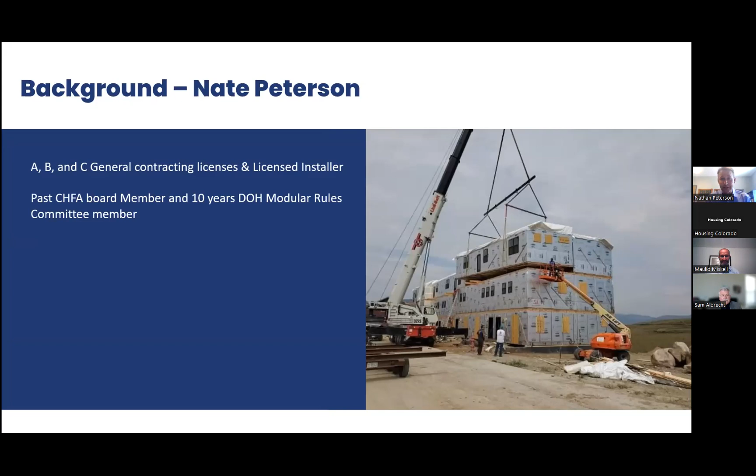I have my A, B, and C general contractor's license. I'm a licensed installer for modular housing, something the Division of Housing also regulates. I'm probably closing in on 700 to 1,000 modular boxes I've set in my life over the last 20 years or so. That's actually me in that man basket in the picture, on a project up in Granby about 2 years ago - a bunch of townhomes we put together. I'm a past CHFA board member and have spent 10 years working with the Division of Housing on their modular rules writing, trying to help our industry. I'm a big affordable housing advocate, which is why we wanted to put this together for you guys. From an education background, I'm a mechanical engineer with an MBA in finance and accounting.

Important to note, nobody's trying to sell you anything here. I run a retail sales operation and do our own development work, so there's really nothing I could sell you. I just wanted to, as somebody who's an advocate for affordable housing, pass along as much information as we could about how we've been doing this for the last 18 years and some of the lessons we've learned.

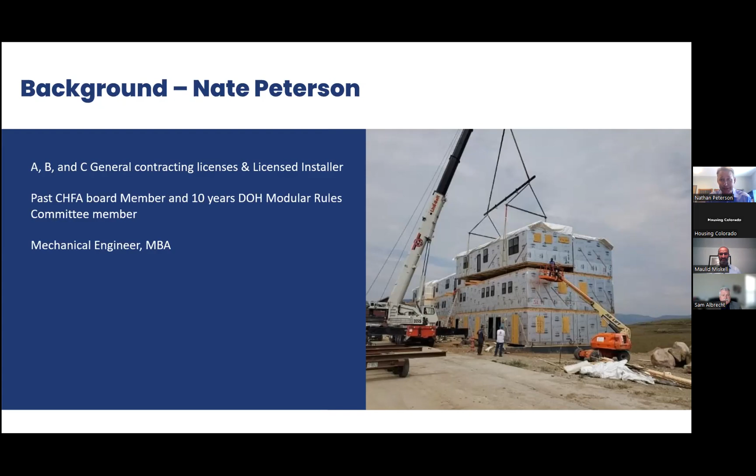So we wanted to start out by talking about the difference between modular versus manufactured housing - two terms that often get thrown around interchangeably, but there are some pretty big differences between them, and we just wanted to make sure everybody was on the same page.

Manufactured housing is what a lot of people might call mobile homes. They don't make mobile homes anymore, technically - they make manufactured housing. But manufactured housing is built to a building code managed by the federal HUD agency, and it has different building standards. They allow for 2x3 walls, and the insulation isn't as good, things like that, but it allows for a very inexpensive way to produce a housing vehicle.

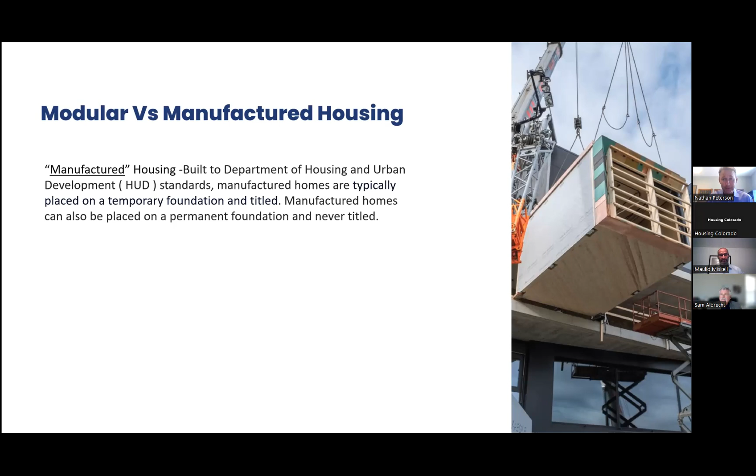One of the big differences between manufactured and modular housing is that manufactured housing typically is placed on a temporary foundation - often jack stands - and the house itself is tied down to the ground through stakes and strapping, then skirted. Manufactured homes can be put on a permanent foundation, but when they're not, they actually have a title because the trailer they're delivered on stays underneath them, so they can be moved down the road at some point in the future, which is why they have a title.

Then we get into modular housing. Modular housing is the same as traditional construction in that it's built to the same set of ICC codes that traditional construction is built to, whether it be IBC or IRC code homes. Modular housing is typically built with the same materials as a site-built project, but one key difference is that a modular house is placed on a permanent foundation in Colorado.

One question that came in from participants ahead of time was to talk a little about financing on these units. With manufactured housing, because it can move, financing can be a bit of a challenge - there's chattel financing, as the terminology goes, and various resources if you need to find financing mechanisms for manufactured housing. With modular housing, there really are no restrictions. Having been in this a long time, pretty much all the traditional financing mechanisms - conventional mortgages, all of those things - are available for modular housing. The reason is it's really no different; it's built to the same exact code as a stick-built, site-built home. So there's really no financing challenges on the modular side of things.

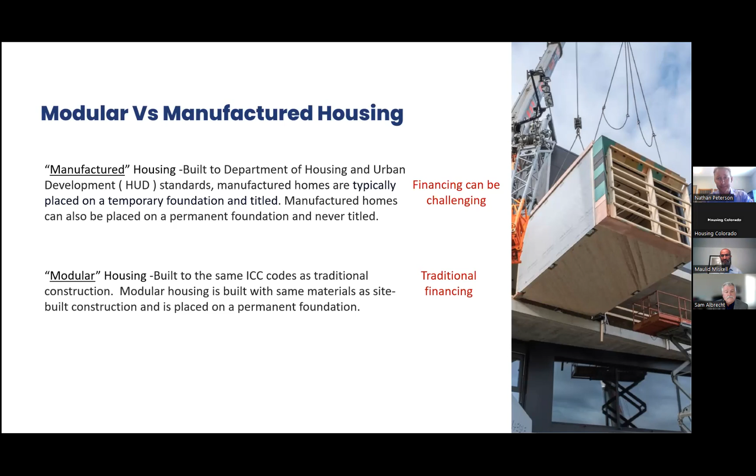So I wanted to cover a little history of our industry in Colorado. Fun fact: our first factory was in Littleton, Colorado in 1940, when the industry showed up in our state. I showed up on the landscape in 2005 or so, and at that time we had around 4 substantial factories in our state. So we were starting in 2005 with a set of factories, and then the downturn came. In 2008 and '09, if you were in this business, you knew things got a little rough from a housing standpoint, and eventually all of our factories went out of business.

By the time we got to - sorry, let me move this, trying to get this bar off my screen, I can't see it.

By the time 2012 and 13 came around, all of the factories that we had in our state had either pulled back to their sister factories located in surrounding states, or they just closed their doors because of the housing downturn that happened. By the time we got back, we spent about a total of 10 years in our state without basically any notable modular factories. And so now we're back up to basically 4 factories.

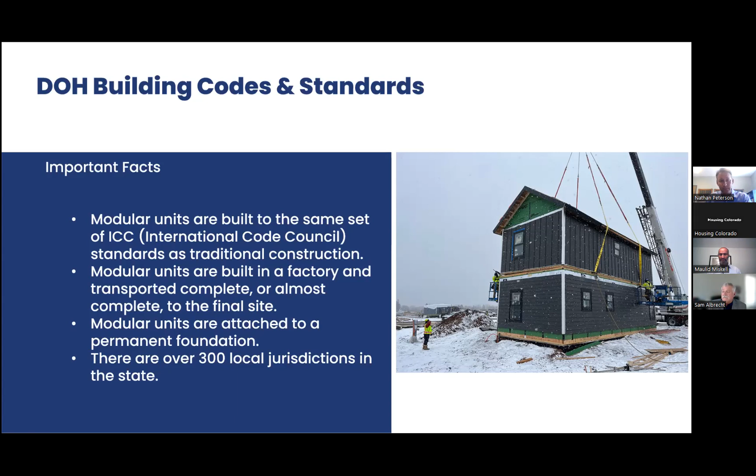So as I said, we regulate the construction, inspection, sales, and installation of modular housing construction for the state of Colorado. We provide one set of building codes for the entire state. We're on the 2018 set of codes, pretty much, with an exception there. We've adapted some of those building codes to be more specific for the modular industry, so we have our own set of building codes that we actually went through an extensive rulemaking with a lot of stakeholder input, and then it goes up to the state housing board, which approves our administrative rules that include our building codes.

The exception is we want safe and quality units designed to meet the environmental conditions of the local jurisdiction. Every unit, once we see the construction drawings, has an address on it—except for some lot models, which we have a way to make work too. Every home goes to an address, and then we look at the local wind loads, snow loads, winter design temps, fire suppression requirements if they have them, and wildfire risk for the structure if the local jurisdiction has them. We make the manufacturers design for that.

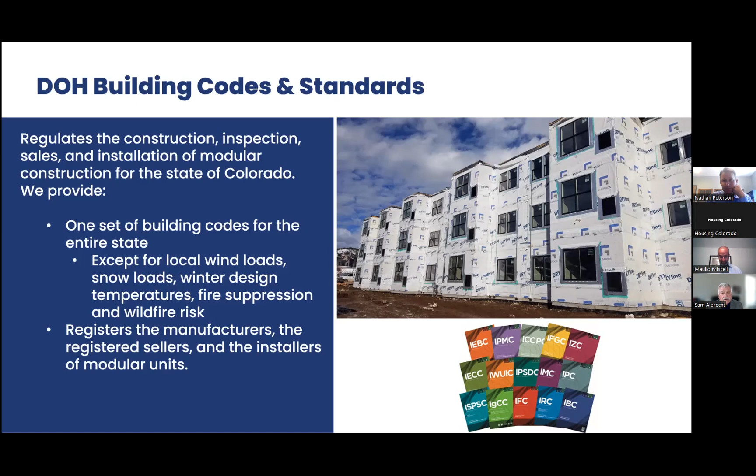Let's talk about those 300 local jurisdictions. We spend a lot of time talking to and educating the local jurisdictions. We consider them very important partners, because when a modular unit is designed, we look at the construction side, but the factory, manufacturer, or seller has to make sure it's properly zoned and permitted based on that local jurisdiction. Some sellers do it a little different, but there are two parts, and the foundation is generally under the local jurisdiction's requirements. So we make sure the home is built right and set right, but the local jurisdictions can't change the code.

It's never a problem generally to go backwards, but we have local jurisdictions that are still on a 2006 set of building codes. New codes, like ours, come out every three years—so there's the 06, 09, 12, 15, and 18 versions, which we're on, and 21 is the most current.

Sometimes a new person in a local building department tells manufacturers they have to design to the 2021 building code. That's where we get involved—we'll have a call with the chief building official and talk it through. We've never had a local jurisdiction say, 'No, Sam, you're wrong.' It's always, 'Oh yeah, that's right, I'll make sure all the guys know.' So that makes it easier for the manufacturers.

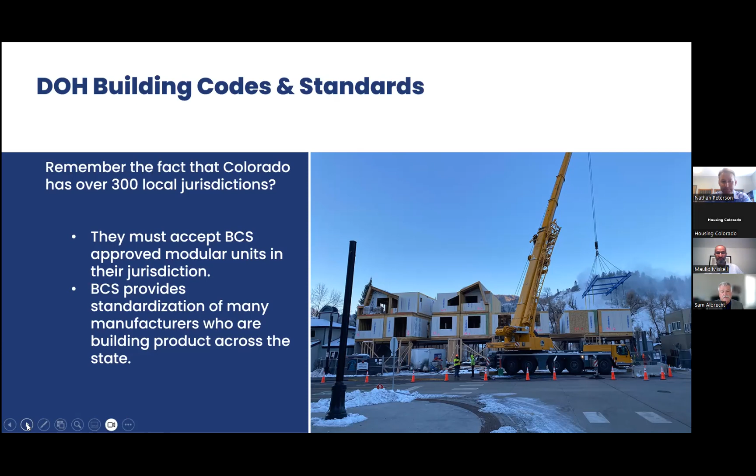All right, so this is where it gets down to the nitty gritty. I think one of the true advantages of modular is that it can be built in, out of the weather and out of the elements.

But the process steps for these are fairly simple. A manufacturer wants to register with the program. We won't register them until we look at their quality assurance program internally, and they have to have a third-party agency if they're out of state doing those inspections for them.

We want somebody in the quality assurance program that will go out there with the tape measure and the ruler and say, yeah, the screws on the drywall are 6 inches apart, that's what it's supposed to be, you guys are clear to go to the next step. And the third-party inspectors are walking through the factory investigating some of that. The quality assurance program makes sure it is built, the quality is there, and there's no shortcuts being taken.

And we have the right to audit these manufacturers as that process goes. After we look through their QA program, and it's reviewed by the engineer, reviewed by a third party, we register them, we take and cash their check, and then they can start sending us construction drawings.

Those construction drawings are submitted. They have to have that address like I talked about, so that we can check the local requirements for wind, snow, fire suppression, winter design temp, and the other local conditions. And then once those drawings go through a third-party agency also for initial review, they come to us for the final stamp.

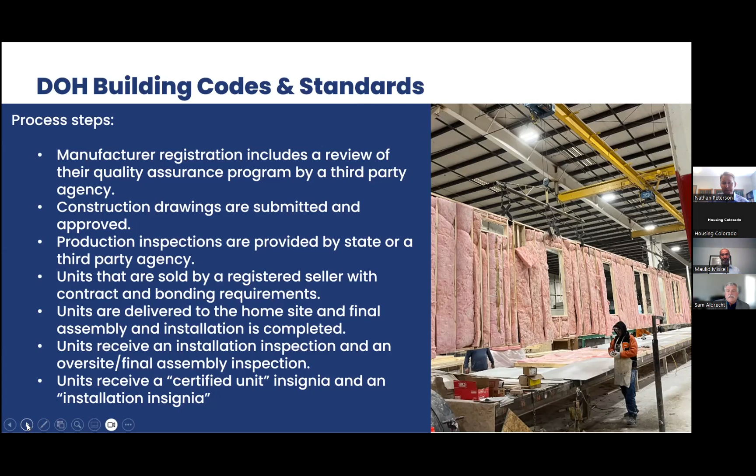All right, I think this is my last slide, but just to talk a little bit about some new things that have come out as a result of statute - we just recently brought tiny homes into the factory built structure program. So now we take a look at the HUD stuff that comes in as far as the installation side, but that federally manufactured home, that HUD code home we all remember as mobile homes, we just do the installation of that. Modular is our big piece where we're doing both the single family and multifamily residential.

And then also we do a commercial program also for commercial factory built - think your standalone coffee shops and things like that that come in as a box. And then we just started this year with the foundation systems.

We have a consumer complaint piece of the program too. The legislature decided that one of the things they wanted us to do was to approve the design and inspect all foundation systems for factory built structures in areas of the state that do not have a local building department. And that's critical to make sure these things get installed correctly. So we're starting off on that process as of the 1st of July of 23.

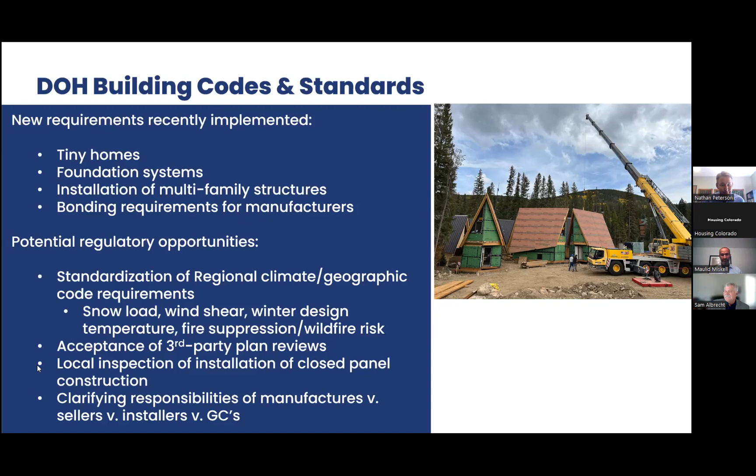Just to clarify, it's a point in time. Just like when a mobile home became a manufactured HUD code home, that cutoff was June 15, 1976. Prior to that date, they were mobile homes built to whatever standard was in the head of the builder, whether or not it was accepted by a local jurisdiction. On June 15, 1976, the federal government effectively stepped in and said from this point forward, they're going to be built to these established standards.

Tiny homes are similar. Prior to July 1st, 2023, it was completely up to the local building department to determine if something was built to be a dwelling, if it was built to be safe, if it was code compliant to whatever requirements that local jurisdiction required. On July 1st, 2023 and on, it's the Division of Housing that's going to be certifying a tiny home as an actual dwelling.

So keep that in mind, we're not going back in time. If you're dealing with a home built in 2021 and they're saying it's a tiny home, it will never have a Division of Housing sticker or insignia on it, because our program started on July 1st, 2023. Just keep that in mind.

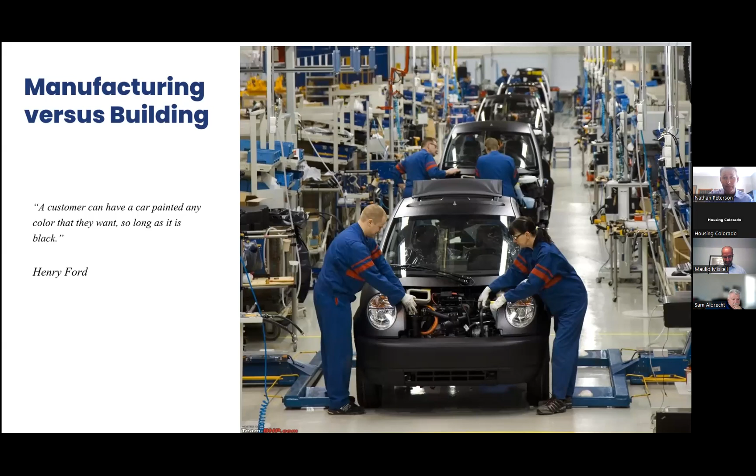We're going to go through some aspects of this. The first is that in manufacturing, all the factories have preset building assemblies - ways they like to build housing, and those vary dramatically between factory to factory. They each have a certain way they like to build their wall assemblies, and they've all found seemingly different ways to meet code requirements for energy and envelope - sometimes they use foam, sometimes zip bar.

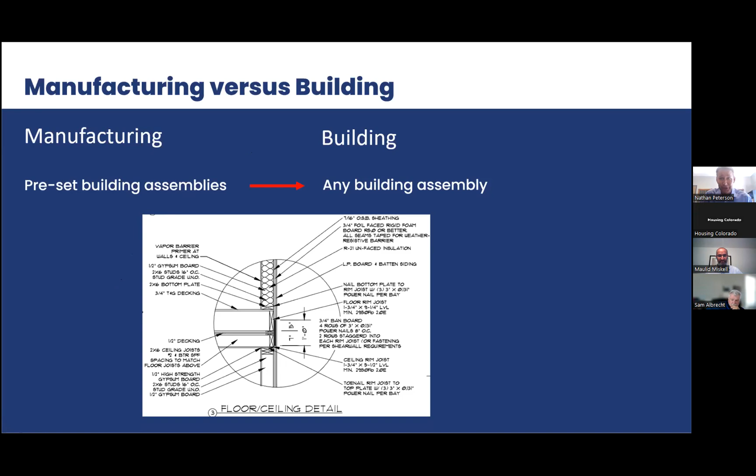This is a detail where, in a manufacturing modular environment, the ceiling is built separately from the floor, whereas in most traditional stick-built construction, the floor and ceiling are the same structural component. So there are a lot of different preset building assemblies associated with modular construction versus stick-built, where you can just do whatever you want.

The next area I want to talk about is box width and length. This is a typical floor plan for a modular house, and that's a box - this is a 2-box house, and that box has some limitations associated with it.

Maximum length we can drive down the highway is about 76 feet in the modular world. Most factories produce boxes in width anywhere from a minimum of about 12 up to a maximum of 18.

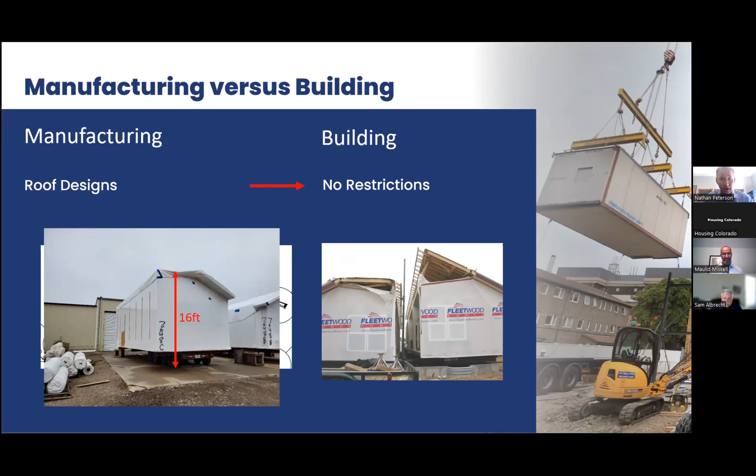The reason why they're doing all of this is when we ship these things, we're basically trying to stay under 16 feet. 16 feet gets you under pretty much all the state highways and federal highway bridges. So a lot of the roof design options that you have when you build traditional construction start to be a little bit more limited when you're manufacturing housing. It really just comes down to standardization - factories need to know that they can build a number of different roof configurations on all of their products, instead of having all sorts of variations.

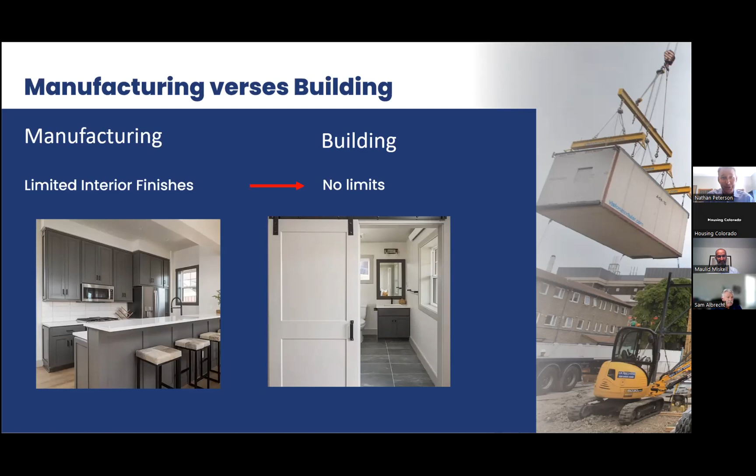Interior finishes. Just like that Ford F-150 on the line, where you can pick out your King Ranch seats or your brown or your white leather, same goes with a lot of the manufacturers. They usually offer a limited number of cabinetry and trim options - as long as you like white or gray, you're good to go on your cabinetry and trim. The reason why is they buy these products in bulk. They're not just buying your cabinetry, they're buying flat packs, truckloads of cabinetry in certain sizes that they'll design every single kitchen with. So there's certainly a lot more standardization to help with cost associated with manufacturing.

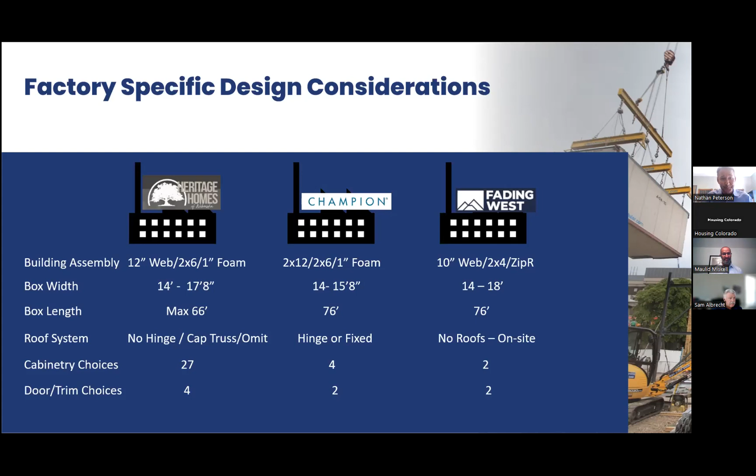One way I like to describe this: if you're looking at an affordable housing project with 2 acres out back, and you sit down with your engineering and architect team, you've got a blank canvas. You can do whatever you want, any type of building envelope, any energy system, any energy ratings. But if you're sitting down to design a modular affordable housing project, the analogy I like is it's paint by number. There are certain things you should do, and certain things you have to do, that don't come into play with the blank canvas of traditional construction.

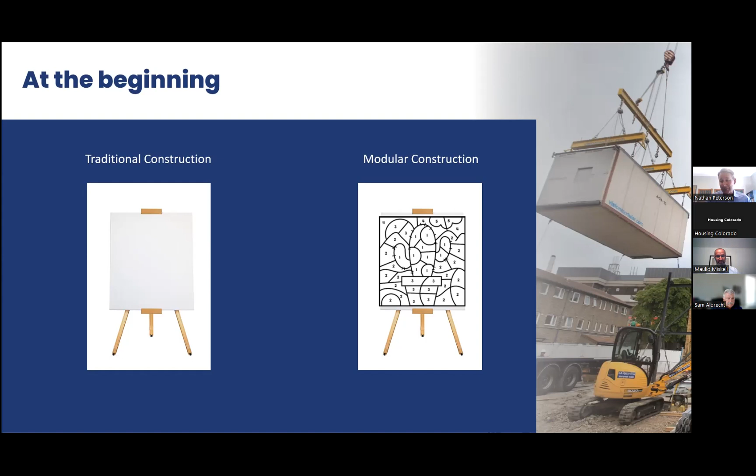At this point I think I've probably got you a little worried, thinking these things must look crazy bad because of all these restrictions. That's not necessarily the case. You can design some really nice looking modular product using all of those design limitations.

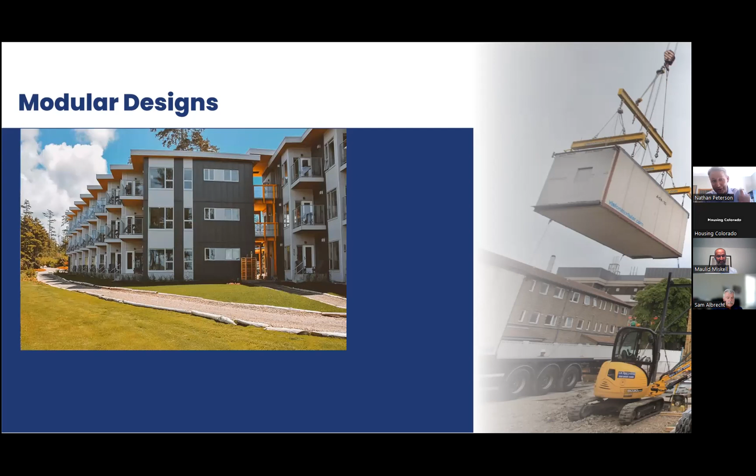These are all products our company has built over the years. This is a great product here - if you look at that roof, it's a nice shed roof, and you can build that whole thing at the factory. The little cute ones we've done.

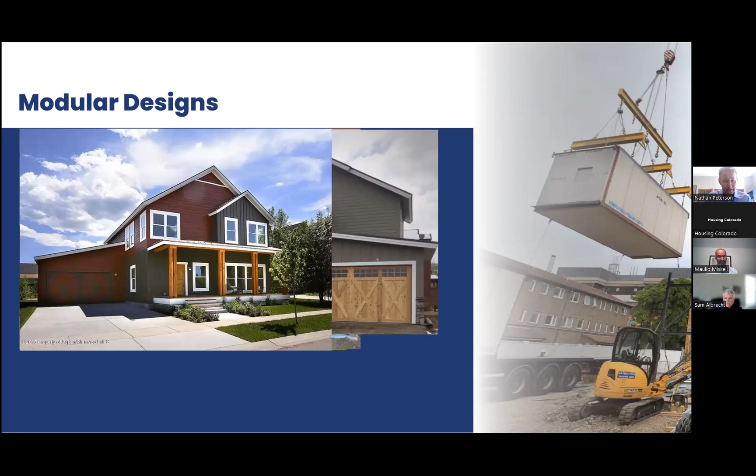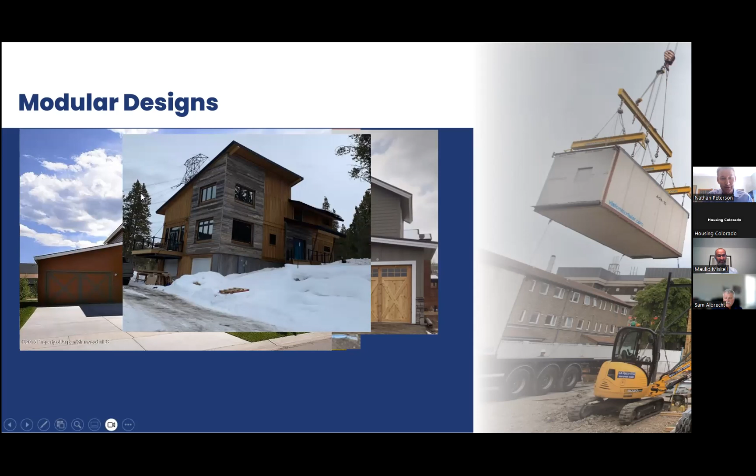Some housing we built in Carbondale, I think, and this is up in Fraser. This had a bit of stick-built roof on it - that roof pitch is pretty hard to do at the factory, so they omitted it and it was built out on site.

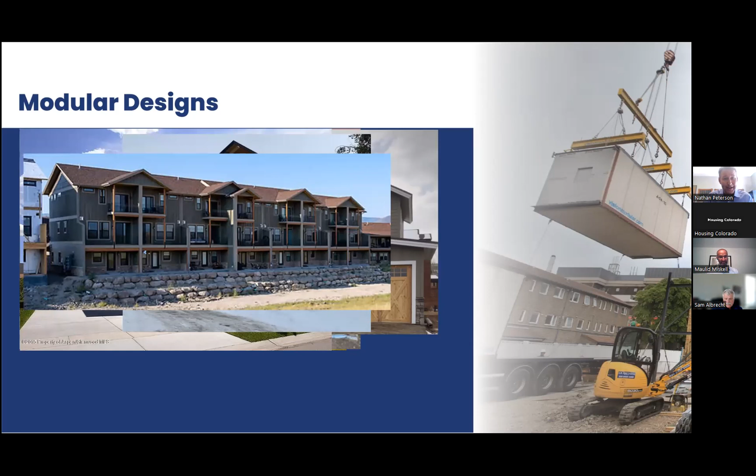This is a townhome project we put together up in Granby. On the backside, all those decks and things like that were built on site, but you can see the modular behind it. This is the front of the building.

As you look at these, knowing they're modular, you can kind of see the boxes, right? And the key is what you're adding to them to dress them up, and how you're doing that in a cost-effective manner. There are certainly a lot of rules that, if you follow, let you build modular housing very economically. But if you don't follow those rules, modular housing can get out of control price-wise pretty quick.

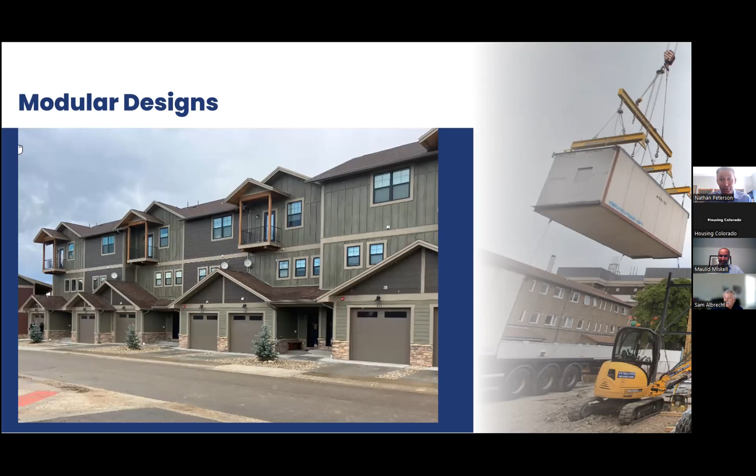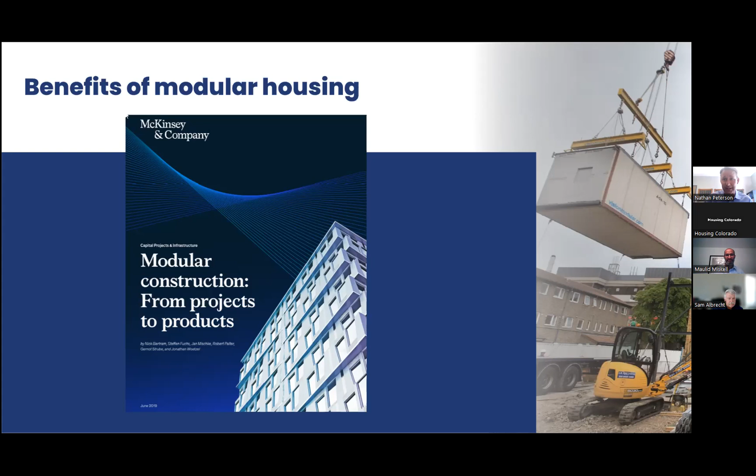So let's talk about the benefits of modular housing. There's a great study in the resource page at the end of this presentation with a link if you'd like to get into it more. McKinsey & Company, a big consulting firm, did a big nationwide study on modular projects and what type of benefits they provide.

The number one benefit from modular housing - Sam touched on this earlier - is that, one, it's built indoors, so you can build it at any time of year. Two, the site work can happen in parallel with those units being built indoors. So when you're in Colorado like we all are, with short building envelopes, especially up in the mountains, this product fits very well. Most of our business heads up into the mountains because modular works very well there. You can start your site work and be weathered in by the time summer's over, if you time it right and get the production schedule you want out of the factory.

Typically what they found is that if that can be accomplished, you're going to save 20 to 50% on your construction schedule if it all works out from a modular schedule standpoint.

The next one is cost, and this is obviously a big topic. Everybody kind of wants to know about this: what does this stuff cost? Mo earlier gave you guys some numbers on what the Division of Housing has been seeing with the 151 units that they've given awards to so far in 2023. I'll talk a little bit more about that data in a second, but as far as this study goes, there's a lot of different areas that drive cost in a construction project, and this study kind of broke them down.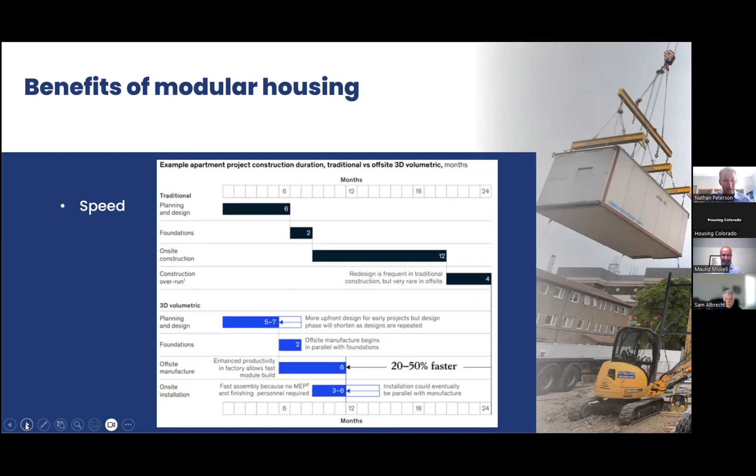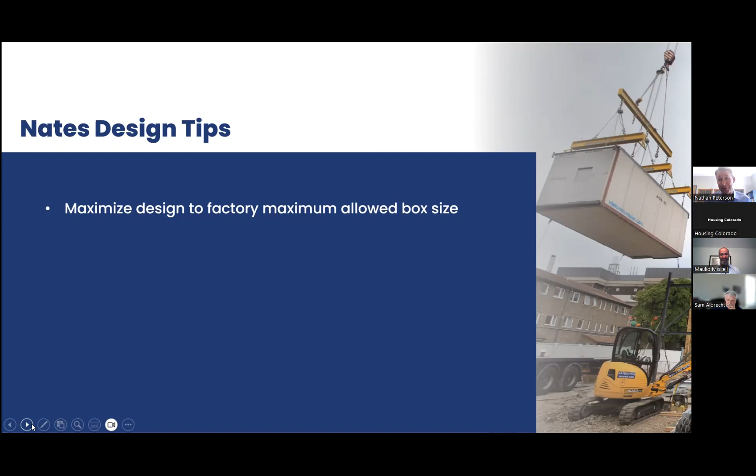So I kind of want to digress a little bit. Those rules that we're talking about - I wanted to provide you guys a slide of what are my rules when I'm designing a modular project to make sure that it is done as cost effectively as possible. Number one is to maximize the factory box size. So if a factory can build you a 76-foot long by 18-foot wide box, and you can design your project to include boxes of that size, you will definitely get the most economical price per square foot out of that factory. If you run a 45-foot box, 16 down the line, that's literally 50% of that square footage - you're going to pay a premium for basically the overhead allocation of the factory applying to a smaller square footage, even though you're taking up the same spot on the production line.

You really need to limit traditional construction activities on the project as much as you can. By that I mean building out walkout basements with traditional construction methods, adding on rooms, decks, and all those things. I realize you need a certain amount of them to make the project look right, but limiting those is what really allows you to have more of an economical experience with modular housing. Crawl spaces are your friend - try to stay away from basements unless you're just going to make them a big utility room. They're inexpensive, and they work really well with modular because we have to get under there to hook up all the plumbing anyway.

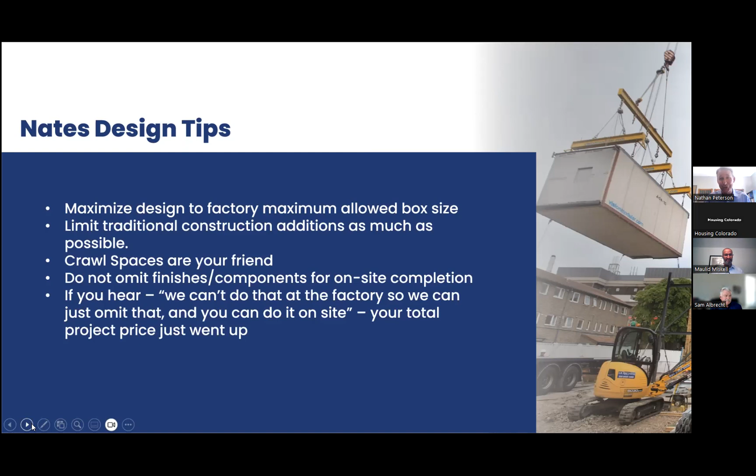Try not to omit the finishes in exchange for on-site completion at the factory. One thing that's happened over the years is factories have started to compete more in the traditional housing world, and they don't want to disappoint. So they've all been trained to say, when somebody says, well, I really want this type of roof, or I really want these cabinets or these interior doors, they don't want to say no. So what they say is, you know what, you can just do that on site, we'll just omit them. At that moment you feel good - oh, I can still have what I want, whatever the design criteria was. The problem is that if you hear that, your price just went up. Your total project price - their price might have gone down a little bit, so you think you got some money back, but by the time you're done out in the field, you really don't want it. You want the factory to do every ounce of work that they are capable of doing, and you want to design your product to maximize the amount of work that the factory can complete.

Last item: lower pitch roofs are your friends. If you can get by with low pitch roofs that don't have hinges and cap trusses on them, the factory will complete all of your roofing at the factory. Just one less thing you have to do out on site to drive your cost up.

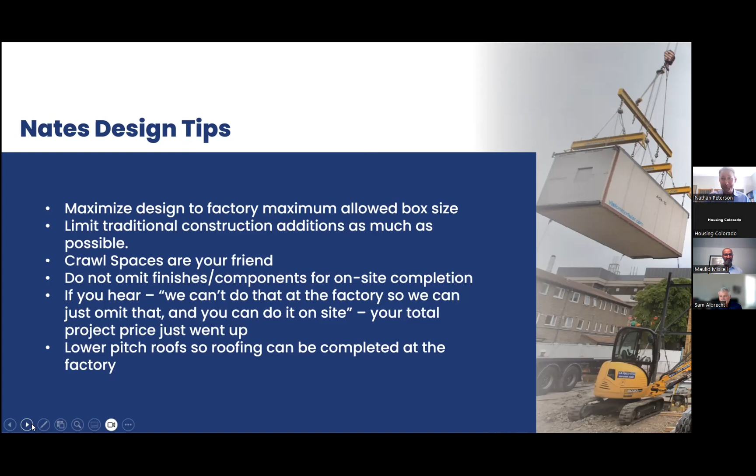So where to start? If you're considering a modular housing project, where do you start? Because like I was saying, it's a little bit different. It's painting by numbers, not necessarily the blank canvas process that everyone is used to.

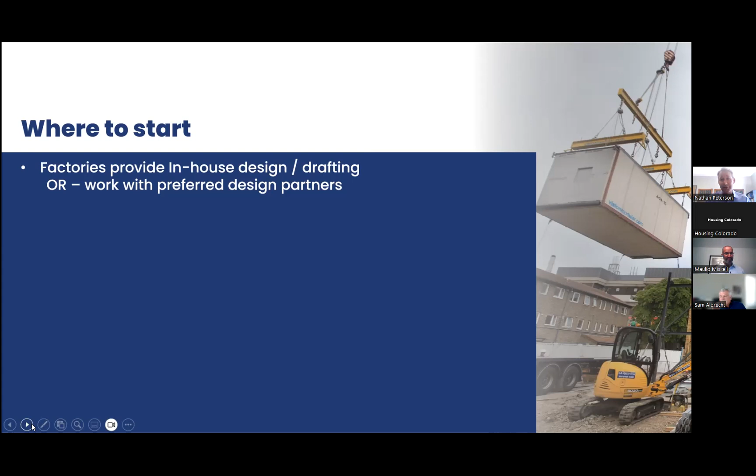When you work with modular factories, every modular factory that I know of has an in-house design, drafting, and engineering department, or some of them work with preferred design partners. I wanted to give you some examples with a couple of factories, so it's not just me telling you this. Guerdon is a really big outfit out of Idaho. They employ in-house staff for engineering, structural, electrical, plumbing, and mechanical systems, as well as full design development and plan approval submittals. Guerdon really does a lot of the design work associated with all of their product.

Fading West, on their website, does it a little different. They have a strategic partnership with EV Studios in Denver. Dean over at EV Studios has built his firm around supporting modular design for the last couple of decades, and works specifically with factories like Fading West. But Fading West takes it even a step further and says, outside of modular architecture, we are happy to work with whichever designer you would like to work with.

If you think about why the factories do this, it's because of all those things we talked about. They have the way that they are capable of building, their own structural assemblies that they're used to doing, the way that they do ceilings and roof assemblies, different trusses that they allow or don't allow. What all of these factories don't want is to have somebody else draw the project and have to educate them on what their factory can and cannot do as the project is being designed.

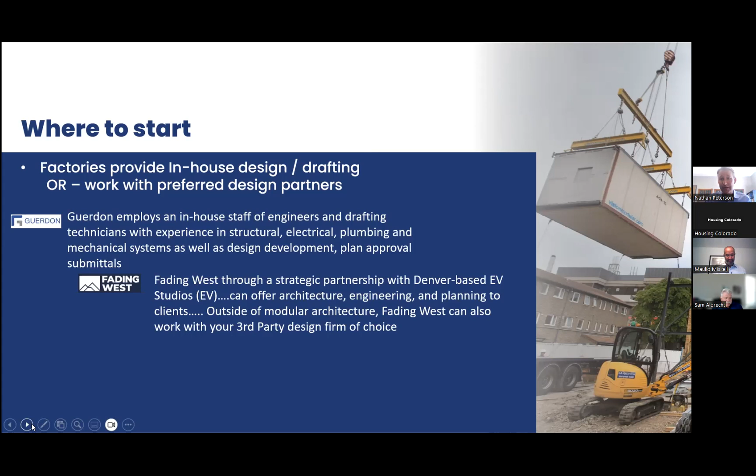Now, a lot of these factories will work with an architect if you're used to having one involved with your team. That architect will be involved in general floor planning, and certainly a lot of figuring out the elevations, the decks, and things that make a modular project look good. But that architect won't be drawing the structural drawings or shop drawings for the factory, because the factories hold that near and dear to make sure they have a standardized process to build their product.

The other one is Rise Modular. They say connecting with a modular manufacturer as early as possible is probably the best way for evaluating whether you have a good modular project or not. So that's where to start. I would say a lot of these conversations start either directly with the factories or with some of the designated design partners that these factories work with.

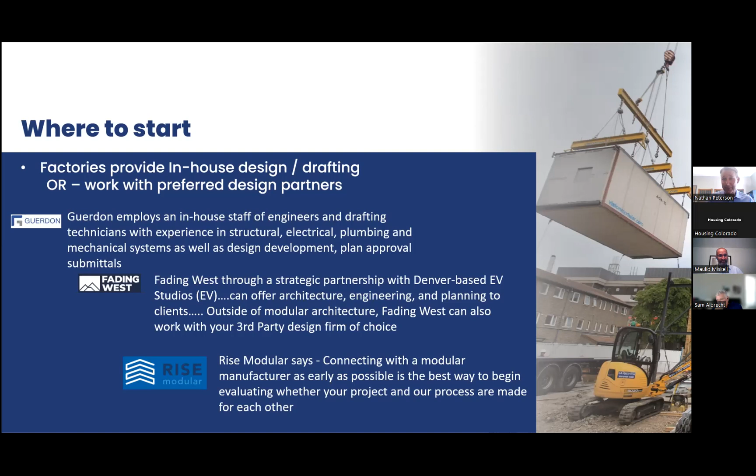They have sales staffs who can help you understand what's possible and what's not possible. They can very quickly give you estimates, and can probably even provide some buildings they've already built and say, hey, this is what this one's currently pricing out at, just to give you an idea of what you might be dealing with, pricing wise.

On that note, I wanted to talk through a little bit about the typical factories that have been serving Colorado, that were on that pie chart earlier. Each factory has its own capabilities, so they each have a product type that they're better at than other factories. I wanted to group it by that.

There's three factories, Guerdon, Nashua, and Rise, that are the big multifamily factories. If you're going to build an 80-unit apartment building on a podium in Metro Denver, these are your guys. They're used to that. You cannot call these guys and order a single family home. They won't talk to you.

And so these are the big players that provide the really large modular projects to Colorado historically. There's a company out in Nebraska called Bonnavilla. They send a ton of product to Colorado. These guys do single-story, single-family homes really well, as well as smaller multifamilies. They do a really good job with the fourplexes and eightplexes, things like that. They kind of have that market.

Champion, who is also out in Nebraska, sends a lot of product to us. Champion, low-cost single family, they do it really well. They kind of look a little bit like double wides at times, but if you're looking to put up a lot of low cost, middle income or for-sale middle income type of product, Champion's definitely your low cost provider in the single story, single family front.